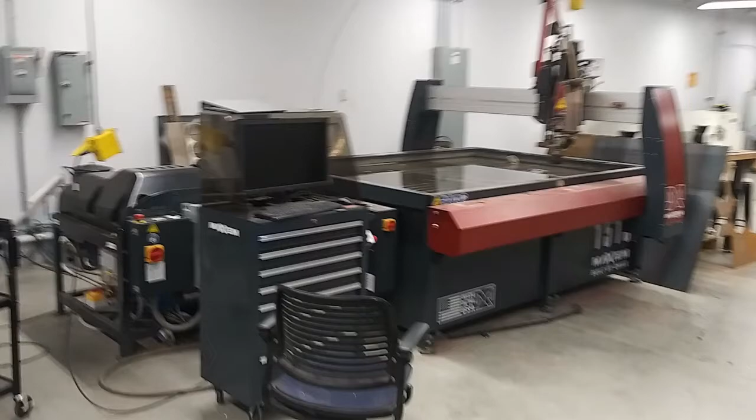Hey y'all, I'd like to start a new series, a little bit of behind the scenes in a machine shop. So episode 1 here, we'll be doing the startup procedure, the CAM work, material loading and actual cutting on the waterjet. In our shop here, we have a Maxiem 1515. So let me go ahead and walk through the startup procedure with y'all.

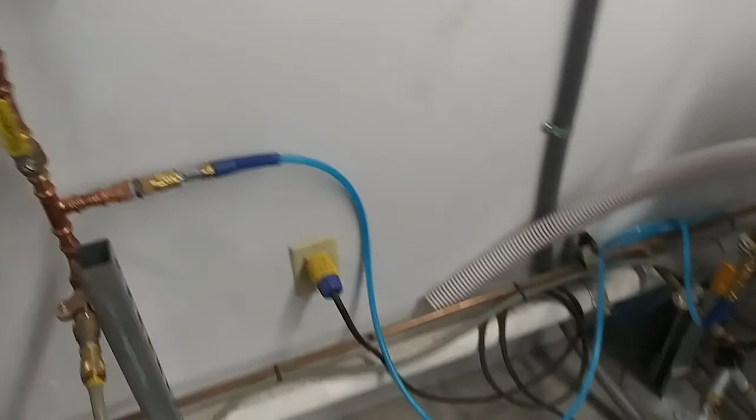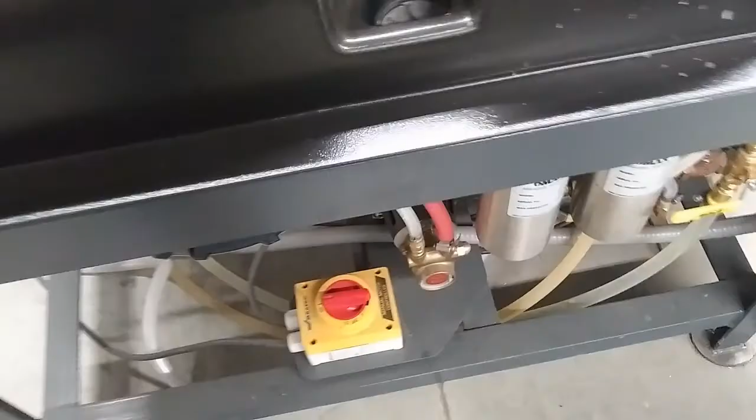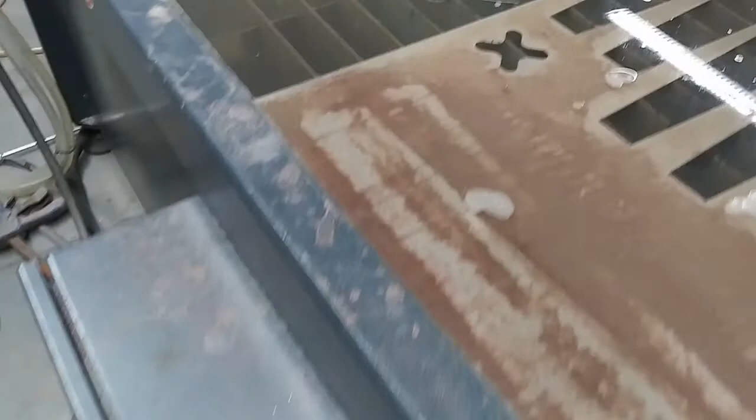So first off, there's 5 main things whenever starting the machine up. Number 1, turn on your air. Number 2, turn on your water. Number 3, there's 3 electrical switches. So number 1's your low pressure water pump. 2 is your high pressure pump and VFD. Then number 3 over here is your servo motors and your computer.

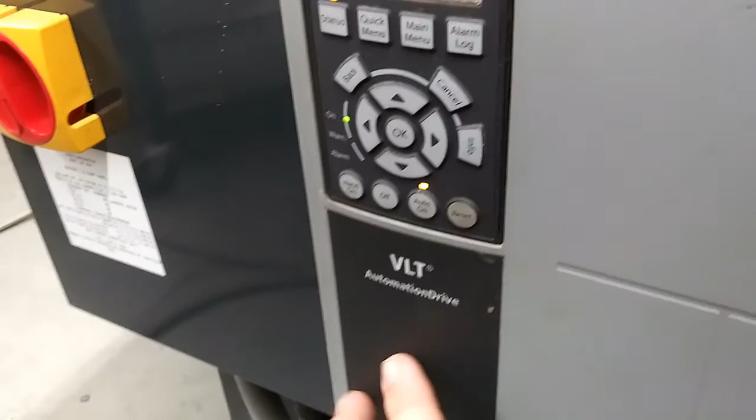So now you can see the computer is booting up here. Well, before we do this, let's check one other thing. So top of your display here, if that's not showing right about 0, right now it's 30.4, that means it's faulted out. So you have to come down here and reset your VFD. So just hit reset there. It resets your configuration, and that takes your water pressure back to about 0 on that screen.

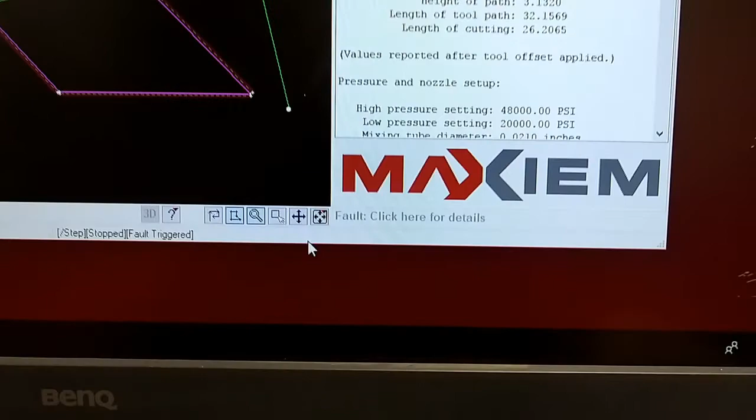And also any fault codes, we come over here to our remote control, click through these buttons till this light's green, and it's still showing a fault code here, so we'll click and see what that's about. Let's close out of this window. So what are we faulting? So it's just axis faults. So that means we come back down here, hit the black button and the green button, and now our codes are cleared there.

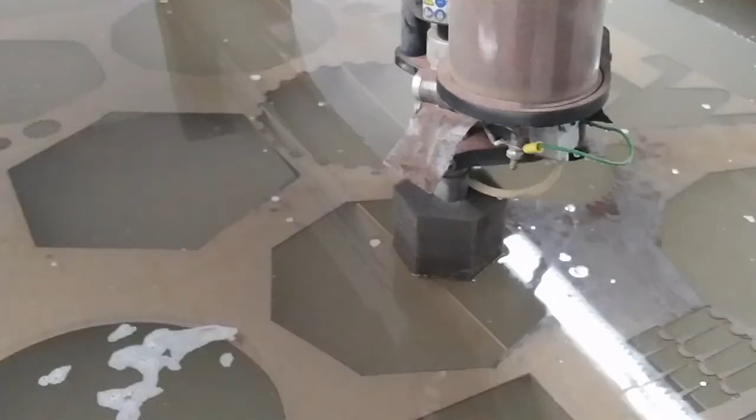So we'll have to move it over with your arrow keys or your X and Y axis adjustments here. So you can see it's moving along the X-axis right now. Now that we have moved the nozzle off of material to where it just has a clean shot into water, we can run our test now. So we will come over here to this screen, open up the test block, and hit water only, and we'll start the test. So this will actually fire the nozzle. You heard it kick on there.

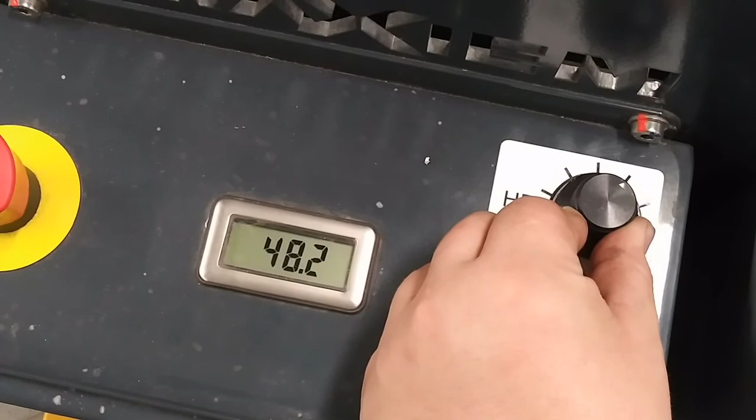So while that's running, we want to check and make sure this value is approximately 48. So it's a little high, so we'll turn it down with our high pressure adjustment. You can hear the motor actually slowing down there. So that right there is where we want it. So we can end this test. So come over here on this screen, just hit the stop button.

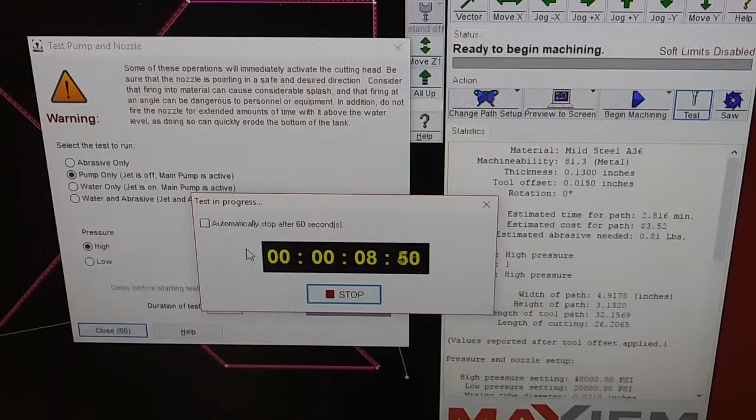So now what we want to do is come over here to the pump only, click that, and we'll start this. This will fire the pump but not the nozzle. And you want to let this run for about 3 minutes to warm your pump up. That's first thing in the day. You don't have to do this every time you cut, just whenever you first fire the machine up.

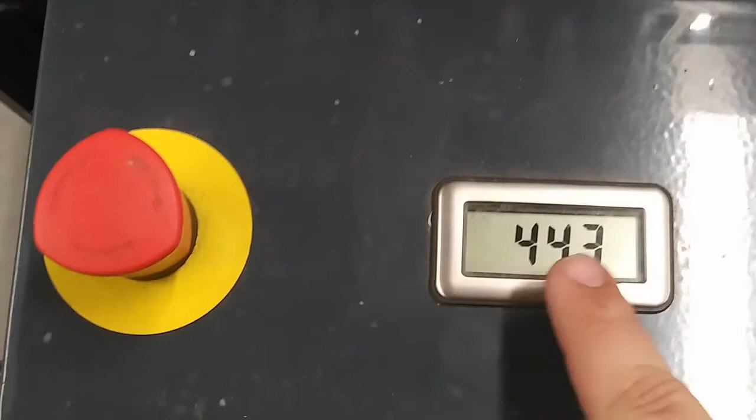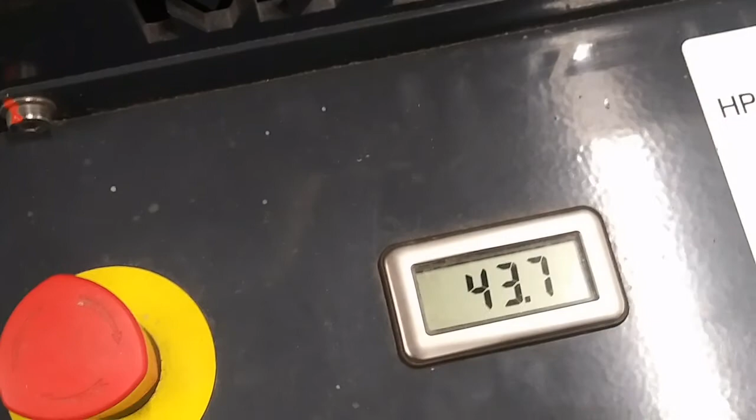So while it's running pump only, we want to check our relief setting. So this relief number, we want it to be between 45 and 46. So right now it's a little low. So how we'll actually adjust that is down in here, there's a wing nut and that big yellow nut. So if we just adjust that, we'll see our pressure change. Right about there is where we want it. So we'll set that in place with the wing nut, and that's good to go. And like I said, there's hot water coming out of the relief valve piping there, but nothing out of the nozzle right now.

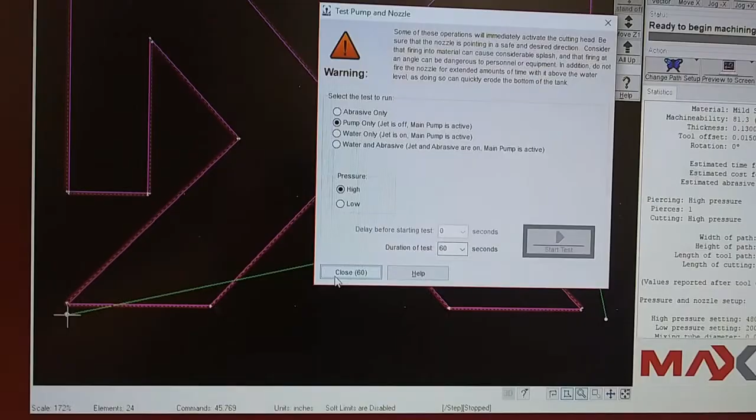So like I said, we want to let this run for about 3 minutes. Alright, so now we've surpassed the 3-minute mark, so we can stop that. We'll close out of our test screen here. Alright, now that we have the machine warmed up, let's go ahead over here and open up our layout program.

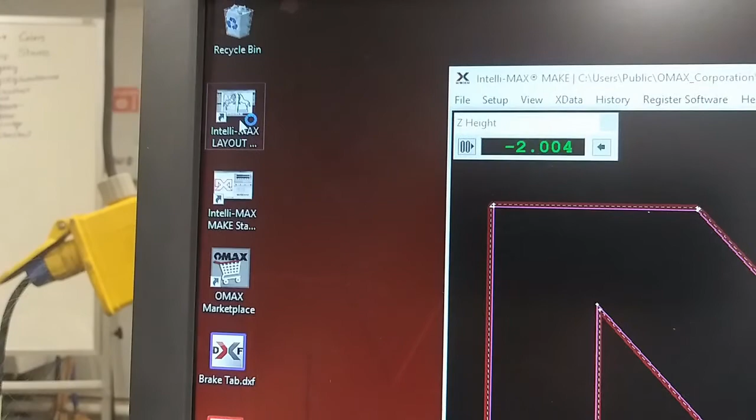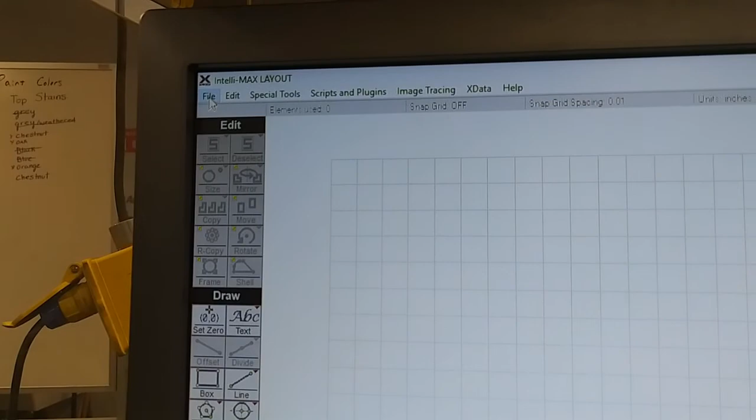This is a CAD CAM software here. It's very basic. For actually doing drawings and stuff, I recommend just doing it on SolidWorks, save it as a DXF, and we can import it. That's what I'm going to demonstrate here. So we're going to come up here to File, do Import from Other CAD. Brings up this menu. We have it on a flash drive here. We'll open up what we're going to cut.

This is what we want to cut. It looks okay. So we'll do OK. Then that there is the profile, what we're going to cut. So what I like to do every time I import something from SolidWorks is we'll go up here, right click, select, do all, it highlights it all. Then I like to come over here to the clean tab and we'll just run a cleaning process real quick.

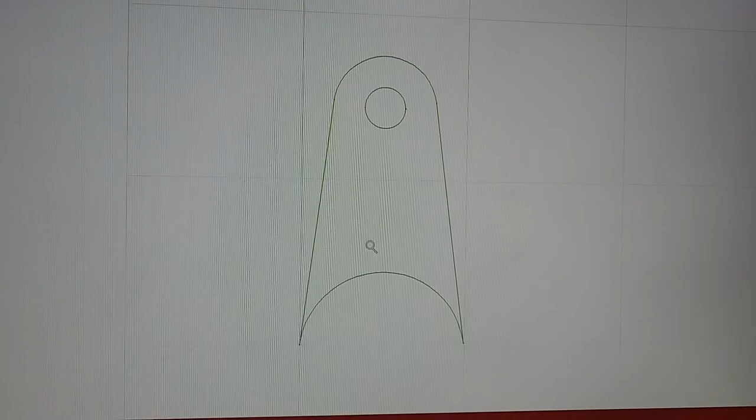What it does is check for any gaps or duplicates, little errors. Sometimes in SolidWorks you can draw something and not notice it and something doesn't snap together quite right. And you can leave little tiny spaces and it kind of confuses the CAM software here. So now that we've done that, we're going to set our cut quality. So for this we're going to do a medium cut. So we're going to do Q3A on the keyboard here. And that sets our cut quality.

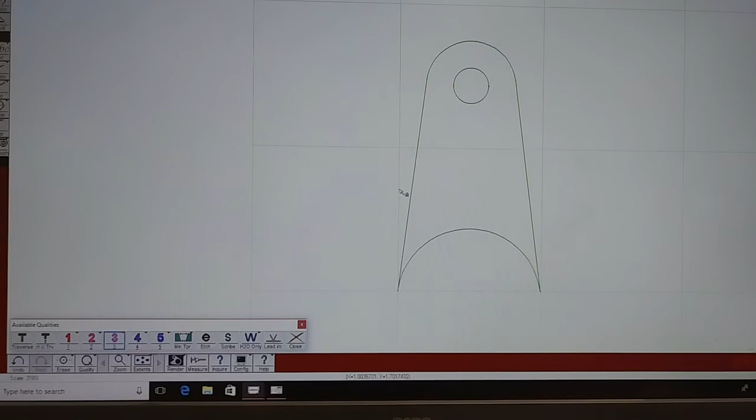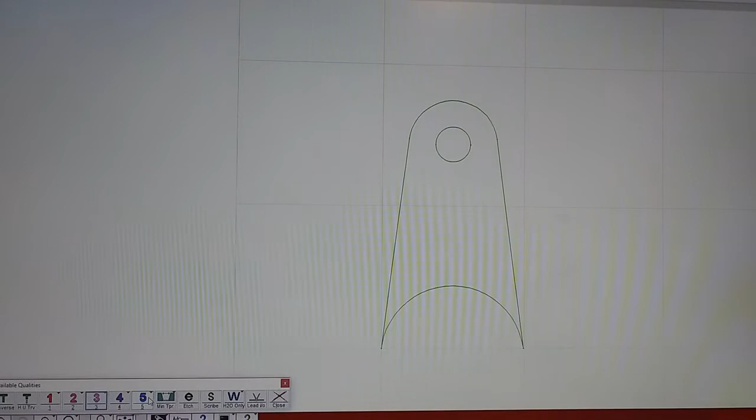You have anywhere from a cut quality of 1 to 5, with 1 being the coarsest, 5 being the highest tolerance, nicest finish, but 5 takes an extremely long time to cut. I find 3 to be a good medium between cut quality and speed. So for most generic tasks, I will just do a cut quality of 3. But if we're doing something like gears or something like that, we'll do 5. If we're doing a really thick material, just for rough brackets and stuff, we'll do like 1 or 2 because it speeds up the process some.

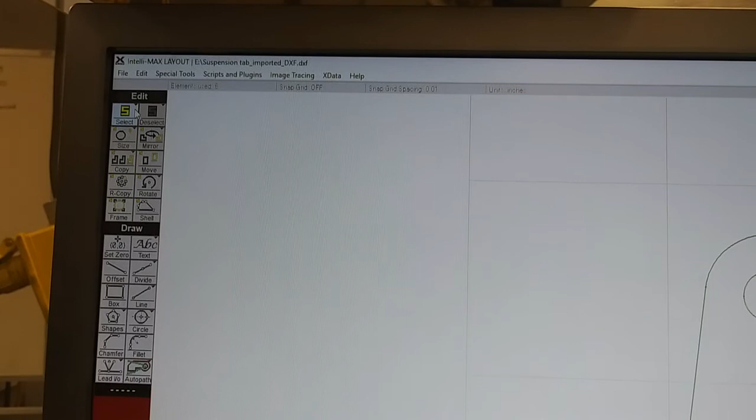But sorry, I forgot a little step. So before we do our cut quality, we're going to go up here and hit select all again. So it highlights it all. Come down here, do Q3A. That there has our cut quality. So now that we have our cut quality set, what I'm going to do is, this here is a tiny little part. I actually need to cut 8 of these, I believe.

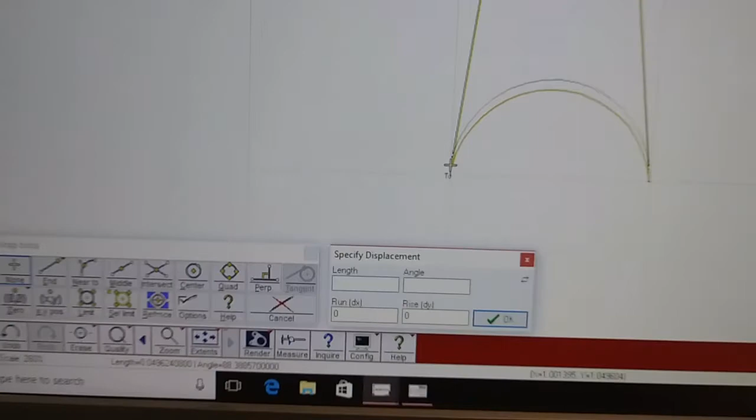So I'm going to come over here to our copy function. Then come down here, select this bottom corner here, select that, then just drag it over here nice and parallel, tap that. Then now that I've spaced it out, clicked it where I want it, it's going to ask me how many I want. So since I want a total of 8, I'm going to do 7 additional. So I'm going to click OK, and boom, there pops up our 8 tabs.

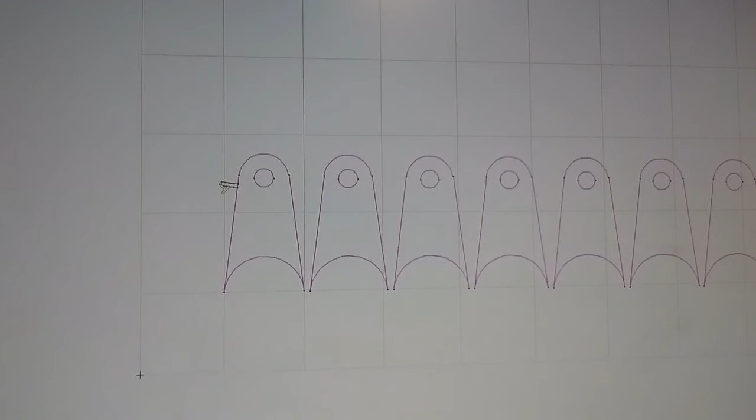Now is the little bit tricky part. So where this is such a tiny little part, if I don't either tab them or bridge them together or create little tabs to the base metal, they'll actually fall down into the bottom of the tank. So since we don't want that, we don't want to waste material, let's come over here to lead to, we're going to right click this little drop down menu and hit create tab. And so we'll just tab it off right there, and we'll repeat for all the rest of these parts. So I'll come back in just a sec.

So now that I have all of my tabs made, what we need to do is create our cut path. So we'll come over here to auto path. I like to erase all of my leads and traverses real quick, just so that it doesn't confuse the process later on. So now we'll right click and do our advanced and configure. And from this step here, it'll generate your path for you. It's usually pretty good. You can go down here and preview your actual drawing. You can see what it will actually do.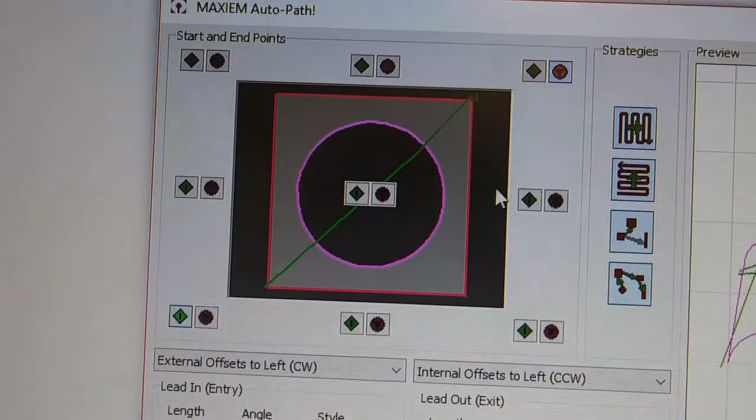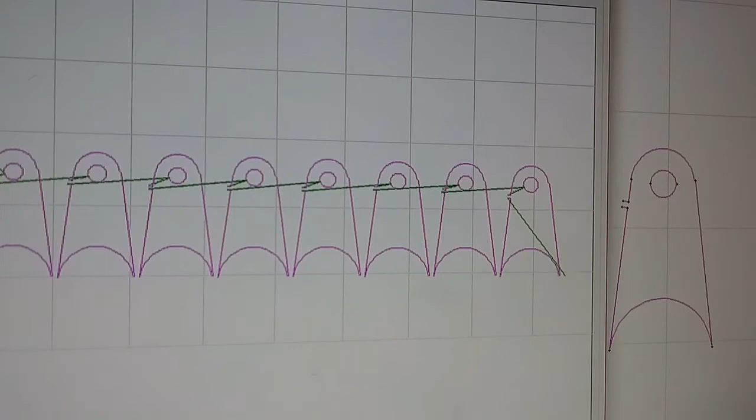This little menu here, you can set where the start and end is. So the green block is your start, the red block is your end. So I can make it start in this bottom left corner and if I click the red block over here, it'll change it to where it ends in the bottom right corner, so you can see how it adjusts your path. Let's say I wanted it to end in the top left corner, it'll automatically adjust our path. Oh, my bad, I made it start in the bottom.

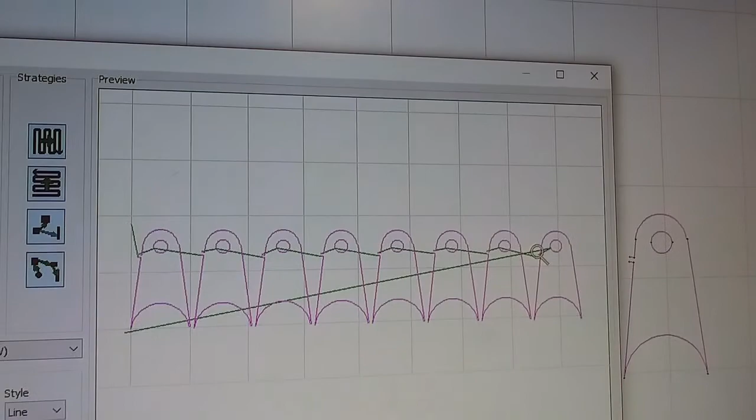So say I want to change it to where it ends in the top left, I'll just hit the red dot here, and you can see how it has drastically changed our cut path. But most of the time, I'll start on my bottom left and end on my bottom right. That way, if say I'm doing multiple parts, multiple runs, it automatically sets it up for the next cut. There's nothing extra I have to do.

If I need to get to the center of a piece of material, this right here is very handy if you want to start your cut in the center. It helps aligning your stock on the machine, but it's pretty rare that I do that. So for this cut, we're going to start in the bottom left and end in the bottom right. Everything else is good to go, so we'll hit go, and it should pop up with your cut path here.

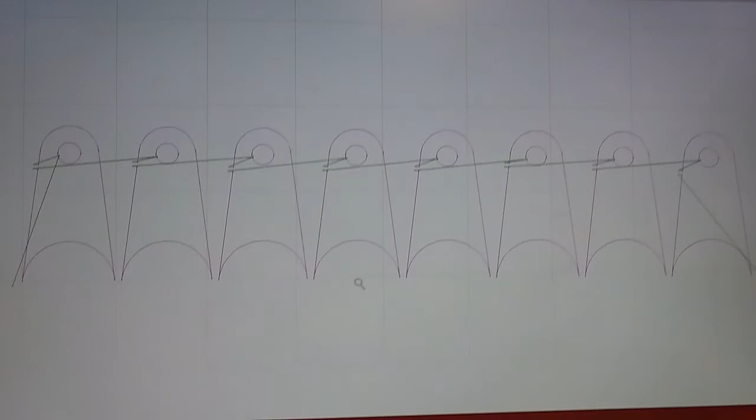So now at this point, come over here and click post, and it's going to ask you to pick your start point. This is just kind of double checking your cut path. Then it'll preview the actual cut path. You can see the offset, so make sure that you're cutting on the right side of your line to keep tolerances and all of that.

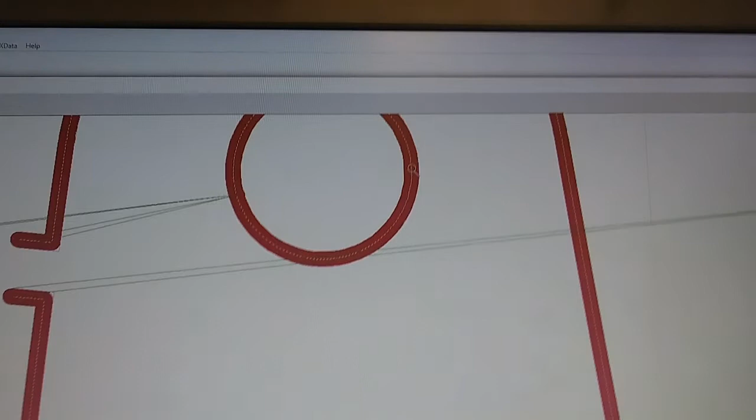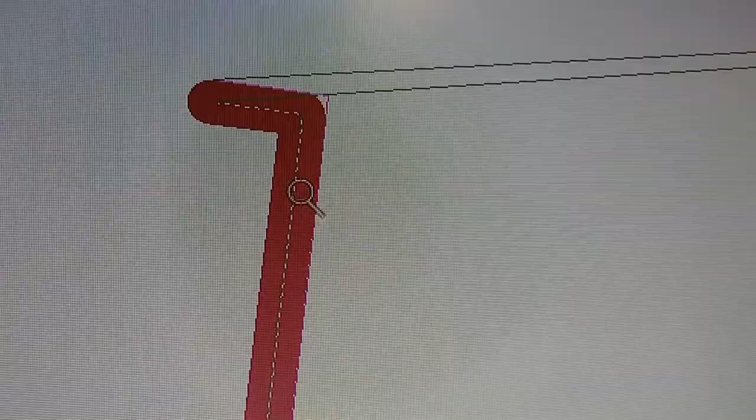So if we zoom in here, we can see the purple line is the DXF drawing file, and then the red line is the actual cut stream of the water. So you can see that the edge of that stream of the water is going to be right up against the edge of your DXF file. You can see, super tiny, that due to the cut path of the water being cylindrical, it can't get into that sharp tight corner, but that's microscopic what it's going to be missing there.

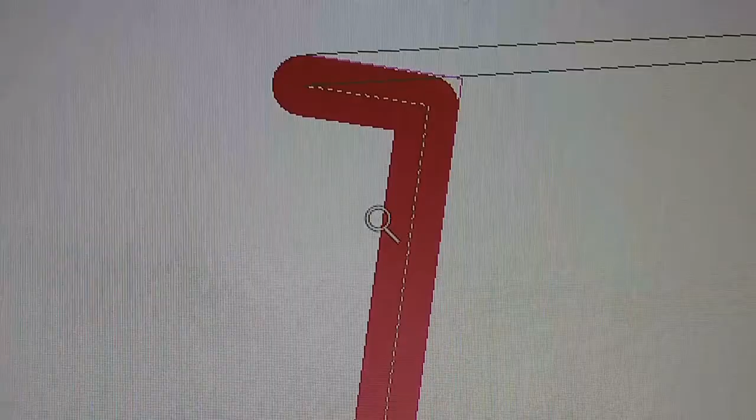But the biggest thing you want to check here is that your cut path is on the right side of your line. So similarly, we want to cut outside of the DXF here so that it's not smaller than drawn, and then we want to cut inside the line here so that this 1/4 inch hole is toleranced correctly. So all of this looks good, the preview's good, no errors, so we'll hit save.

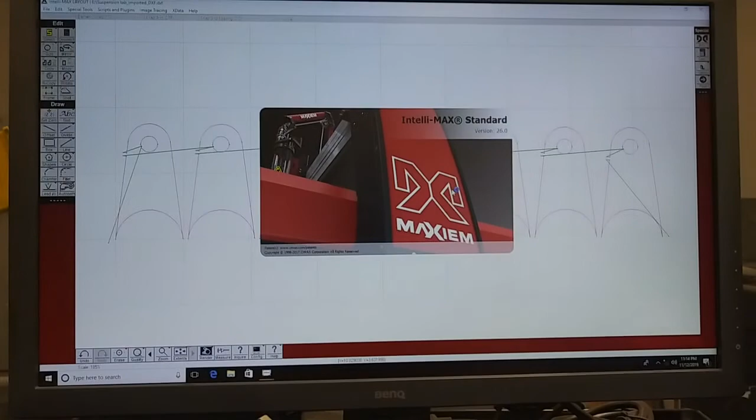Then we'll go up here and right click post again. That'll bring a drop down menu, and we're going to hit open the path in Make. And since Make's already open from us warming the machine up, we'll just hit retry. And then it'll open up Make. So from this point, it lets us adjust our material. We're going to be cutting steel, so that's already set.

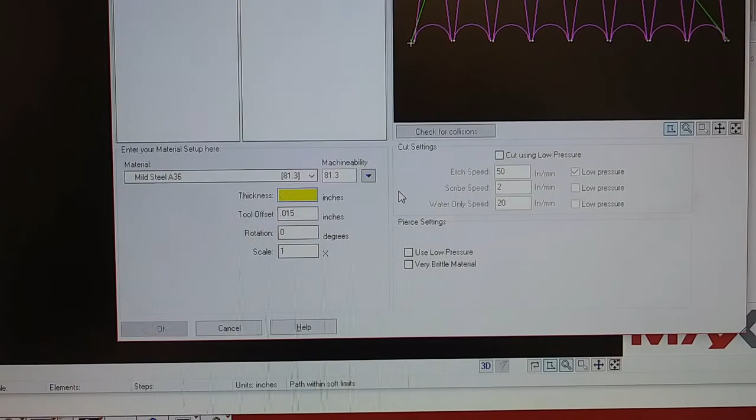We're going to be cutting 1/10 inch material, so we'll change this. I usually do 0.11. I usually like to go slightly thicker than my material, just in case it cuts a little too fast. It's always cutting through the material if you're just slightly over. Let's refocus here. So all of this looks good.

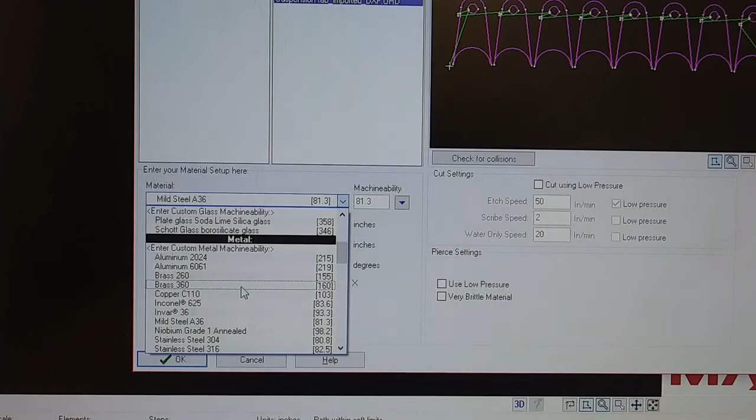We can hit OK, but just to demonstrate, let's say you're cutting aluminum on here, brass. It has predefined settings for basically any material you would ever cut on a waterjet. That automatically changes your feed rates and your speeds, but we're already good with steel, so we can click OK. We'll just click OK here.

Cool little feature is it calculates your cut path, how long it's going to take, the amount of material used, all sorts of metrics. These are very good for keeping records for your machine and being able to bill clients. So now that this is all set, we'll load some stock in the machine real quick and get cutting.

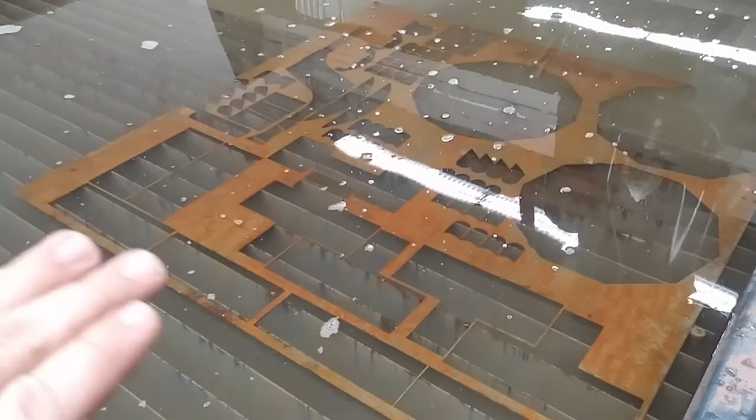Alright, so we've went ahead and loaded some stock into the machine. One thing to make sure you always do is be sure to clamp the material somewhere in the machine, or else the water jet, as the jet's passing through it, has a tendency to vibrate the material and it'll leave you with a rough cut or make it go out of tolerance. So what we always like to do is just these squeeze clamps here.

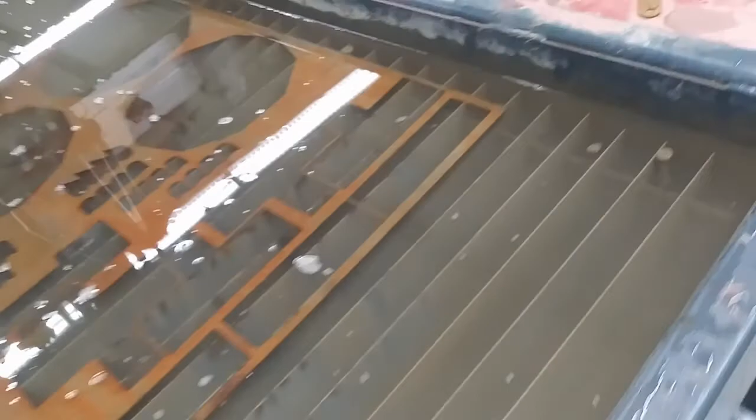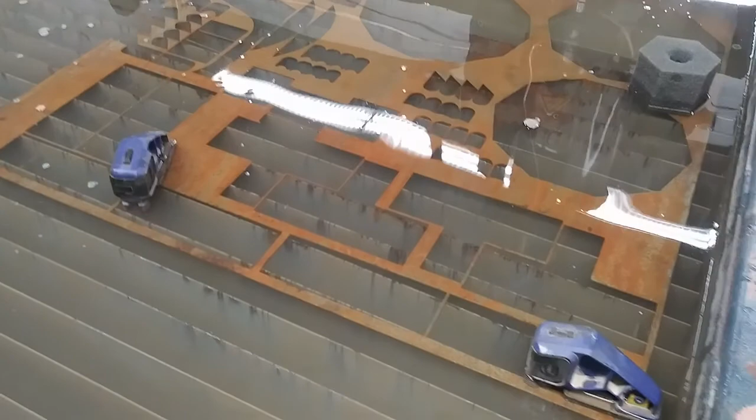Find a good, solid, safe place to tie her down to. So we're going to go ahead, put it down here on this piece of material right here, and we'll just cinch it up and it'll hold it right in place. Alright, so I went ahead and clamped our stock into the machine here. I just tossed two of those squeeze clamps on there, hold it good and steady, nice in place.

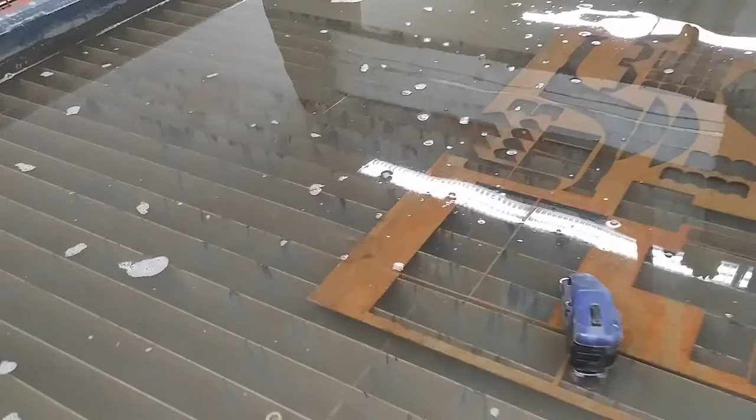So now what we need to do is bring our nozzle over to where our cut path is going to be, set our Z0, go ahead and home it for that spot just in case any errors happen, and then we'll be ready to run the program. So how we do that is for rapid traversing you hit shift and then your arrow keys. Left and right is your x-axis, as you can see, so it's rapidly moving, and then your up and down arrows is your y-axis, so we're going to rapid it over.

So now say you want some slower movement, if you use the same keys, just don't hit the shift key and it'll be much slower traverse. So we need to go up just a little bit more in our y direction. So now we need to zero our z-axis. So to rapid up and down, 7 is up, 1 is down. So right now I'm pushing the 1 key and it is rapiding the z-axis down.

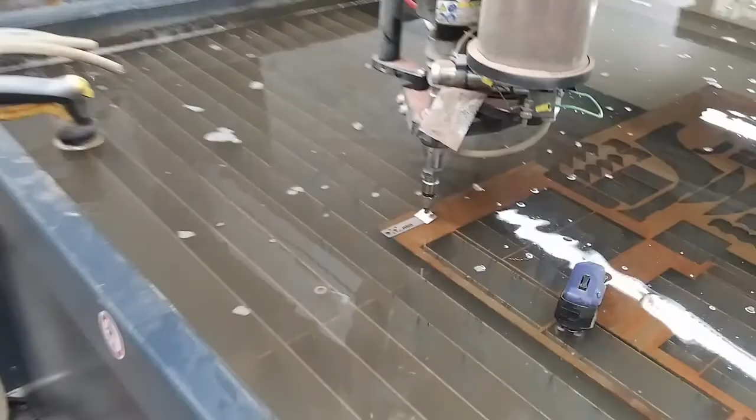Once we touch the water level there, we'll go ahead and use our feeler gauge here. So Omax provides us with this feeler gauge. It's 60 thou. You just toss it right here under where the nozzle is going to go, and then you can come back over here to the controls and rapid it down till that feeler gauge just starts to move. So there, it's starting to move, and then we can do a fine adjustment with page up, page down. That moves it in ten-thousandth increments at a time.

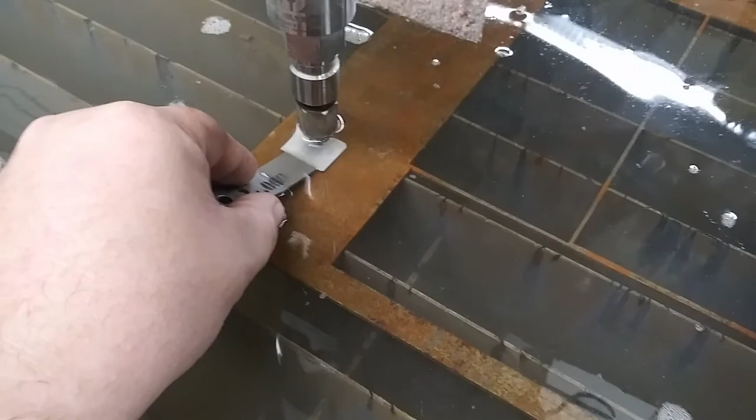So we'll rapid that down, and just like a feeler gauge for spark plugs, you just want to check it until it just gets a little bit of tension. There it's still a little bit loose. So we'll go page down a couple more times, and that has us right where we want to be. That gauge just slides right under the nozzle but doesn't really bind too much.

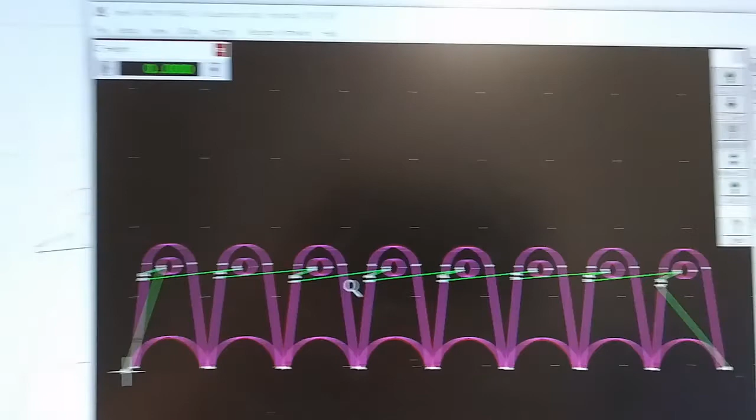So that's good. So we come back over here to the computer screen now that we've zeroed it on the machine. You need to zero it in the program here. So if you hit these double zeros up by the z-axis, it'll ask you if you want to zero your z counter. You just hit OK, and now that value is 0. So now what we want to do is move the jet to where we want to be on our stock. So a reminder that we're starting on the bottom left corner in our file. So we'll just move the nozzle over to give us enough room on our stock.

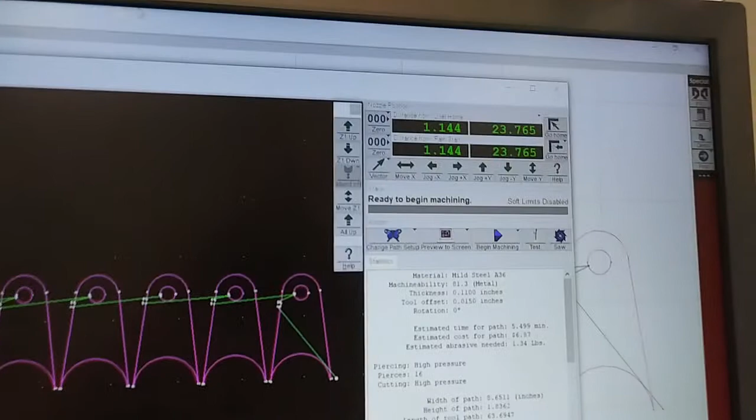And so for this, just in case any errors happen as we're cutting, we'll go ahead and zero our X and Y axis up here. So we'll hit 0, it'll ask us if we want to do it, we'll say yeah, sure. So that is our new home position. Now that we have all of these set, we just need to raise the nozzle and put the sponge back on it so we don't shoot water all over the place.

So what we're going to do is on the keyboard, we're just going to type in Z2 and it'll pop up this menu here. It's just a double check here. So we'll hit go, and when we hit go, it automatically raises our Z-axis. That gives us enough room to toss our sponge underneath of it. Just put this guy on real quick. This guy here helps cut down on splash as you're making your plunge cut, and helps keep down on noise a little bit.

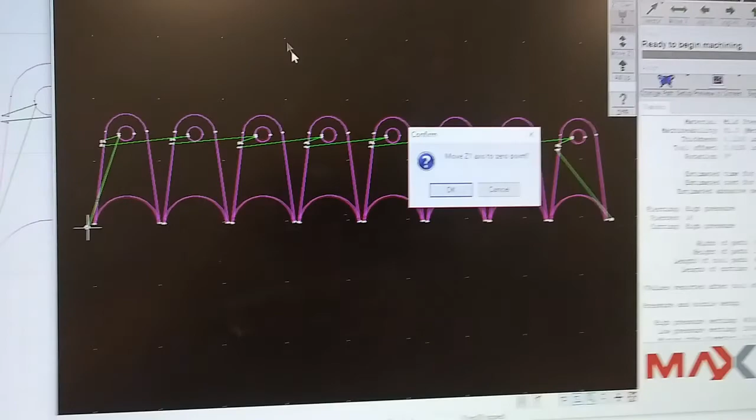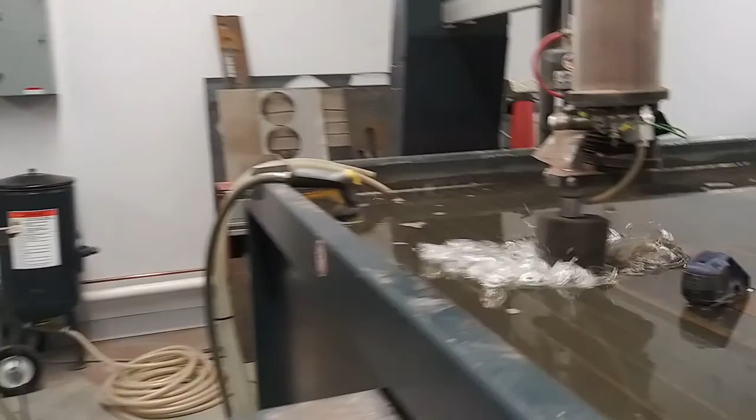So now we're going to go over here and hit the green arrow by our Z height. It's going to ask us to traverse. We're going to select yes, and it's going to go back down to that 0 we set, and now we're ready to cut. So to cut, all you have to do on your program window is hit begin machining, come up here and hit start, and it's going now. Your pump's firing up, cut the pressure, and there it just made its plunge cut.

So as it's cutting on the machine, real time over on the program, that cross you see moving is the actual position of the nozzle. You can see where it's at.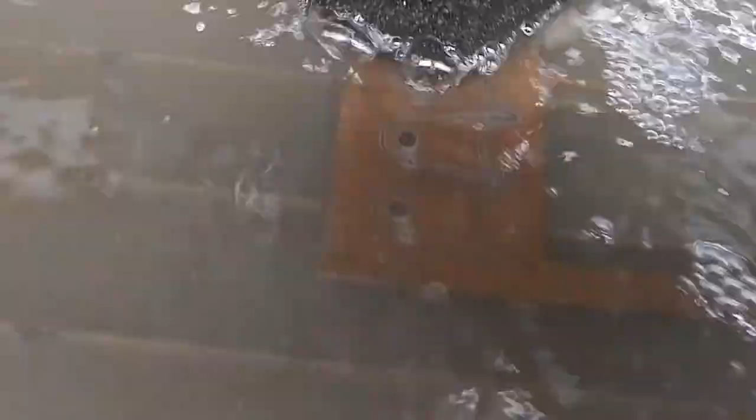So we'll come back over here. While it's running and while it's submerged, it's very difficult to see your part being cut. But if we zoom in here, you can actually see your parts being cut in real time.

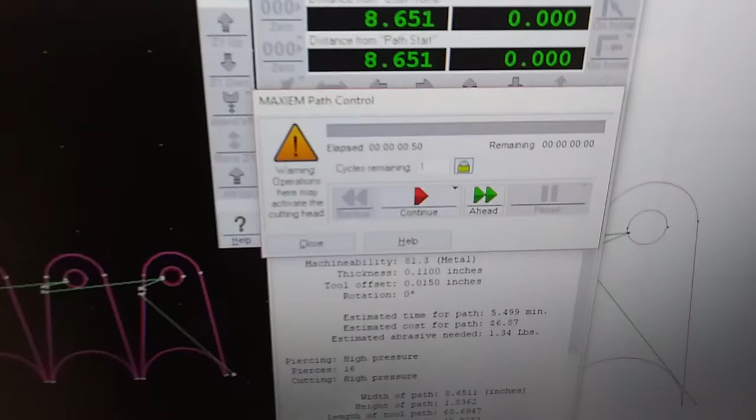Alright, now that our parts have been cut, let's go ahead and rapid this nozzle out away from where we cut, and we can pull those tabs off of here. So we're just going to close out of this cut path, and that'll allow us to jog the machine around. So we're going to raise our Z-axis, get it up out of the way.

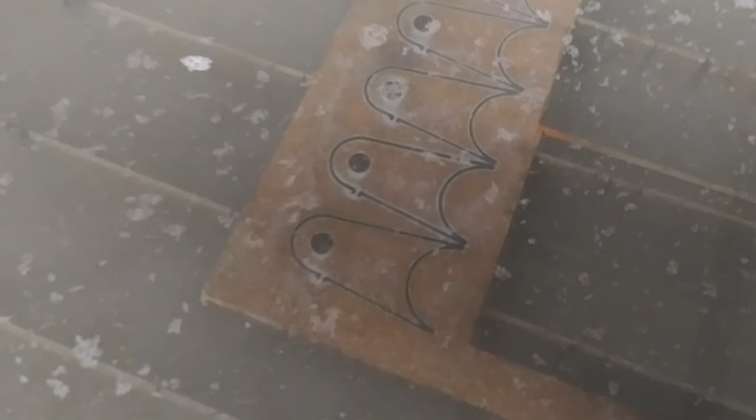Every time I shut the machine off, I like to keep the nozzle out of the water. So we'll rapid it down to the far end, that way we can move stock in and out nice and easy. So now let me go ahead, pull this stock out of here, and you can check out the tabs we cut.

Alright, now that I've removed the stock from the machine, all it really takes to pull these guys out of here is just a little bit of muscle. You can see it breaking loose already there. So, like I said, we have to do this where it's such a small part. It leaves just that little tiny burr on it there. You have to grind that off, but otherwise it's all good.

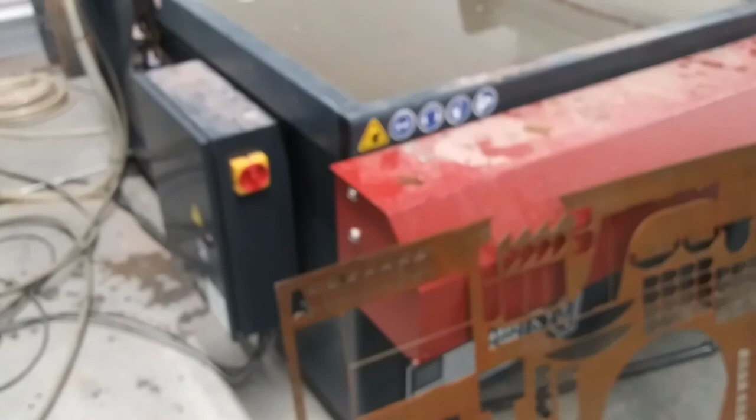The reason we have to do that is, you see the stock lays on these slats, but if what you're cutting is smaller than these slats, it'll just fall through and go into the bottom of this giant tank. We've had that happen quite frequently, so we keep a magnet on a stick and go fishing occasionally, but that's not very fun.

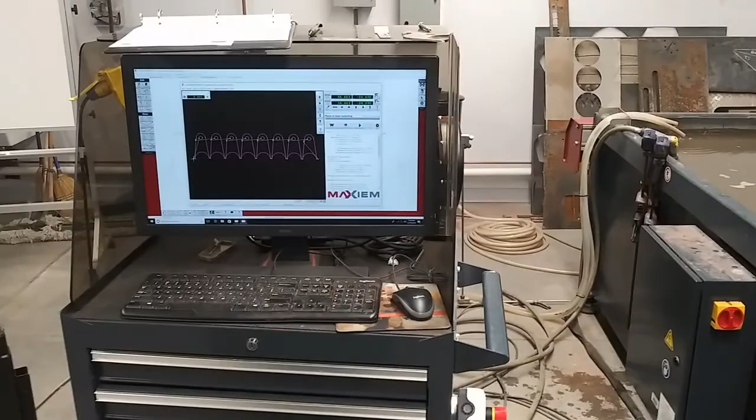Now that we've made our cut, to shut the machine down, you just do the reverse steps of firing it up. So remember, you have your 3 electrical switches, 1, 2, 3. And then you have your air pressure and your water pressure, and it's all good to go for the night. Everything's shut down.

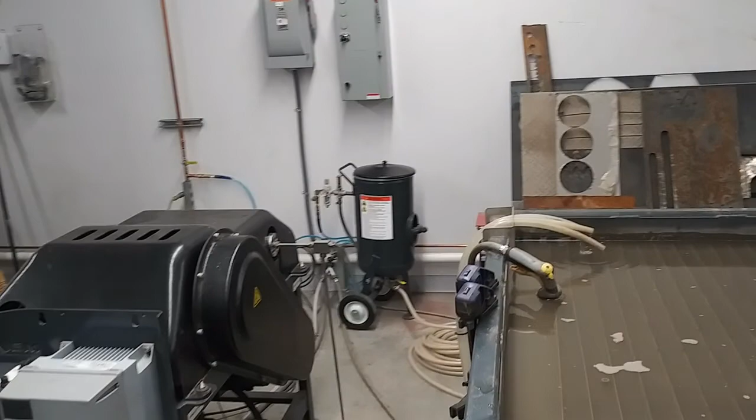One last little tidbit I'd like to add in here. Contrary to popular belief, it's not just water that cuts the material. There's actually this abrasive material called garnet that is fed into the nozzle, into the high pressure stream, and that's what actually does most of your cutting. So that goes into this hopper back here. That is approximately a 100-pound hopper.

So on that cut screen I showed you earlier, it shows you how much abrasive you use per cut. So I'm going to show you how to fill up that hopper real quick. So we come over here to our garnet storage and grab us a bag. Each bag is, I believe, 55 pounds. Yep. This one has a little tear in it, so we'll go ahead and grab it. We'll carry the bag back over here.

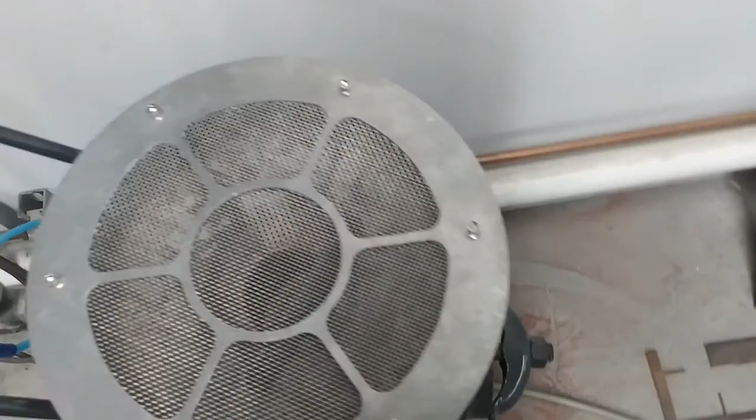I just temporarily set it down on top of the pump here. And then we'll pull the lid off of our hopper. And there's this screen that I like to run the material through. It catches any debris or anything that may be in the garnet. Our cap has already popped down there, so we don't have to worry about that. So we'll just take our pocket knife, put a little slit into the bag and empty it into the hopper here. It's actually a little bit leaking out there.

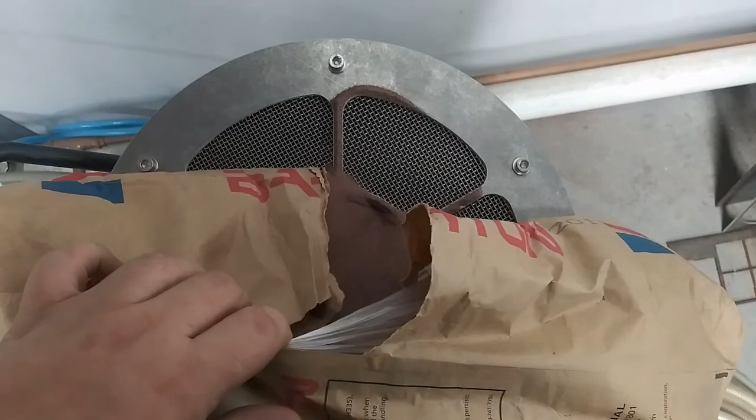So there we're loading into our hopper with our abrasive. This stuff's actually fairly expensive. It's about $800 a pallet. If I'm not mistaken, there's 42 bags of it on a pallet, but you go through a bag of it about every hour or so of runtime.

So just be careful when you are loading this hopper that no foreign objects or large pieces of paper or anything make it down into the hopper, because everything that goes in this hopper eventually gets fed into the nozzle, and it's very easy to clog that nozzle with any foreign objects.

So that pretty much wraps up today's video on how to run a Waterjet from start to stop.

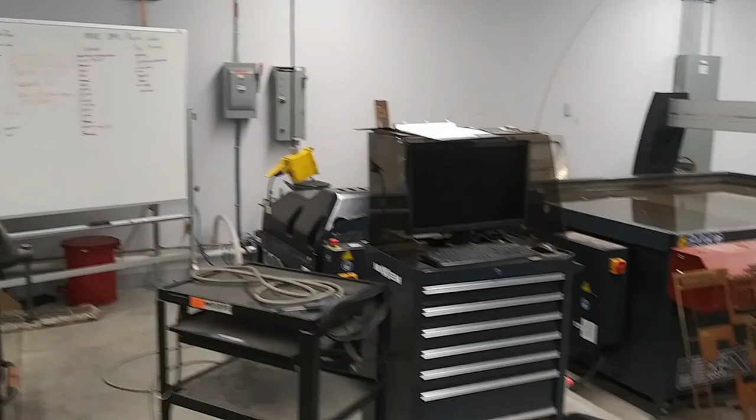Otherwise, this here was our video on how to operate an Omax 1515 Waterjet.